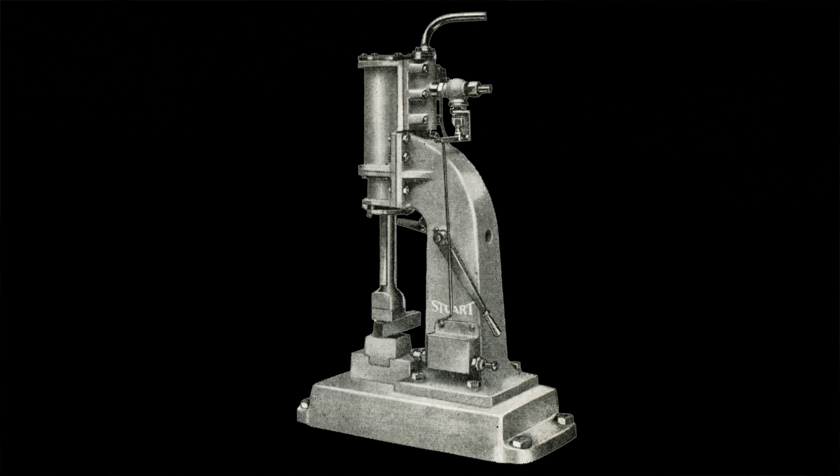Welcome back. It's lovely to have you here for part 3 of making a steam power hammer, a little itty bitty one. We got this component, the mouthpiece, made up in the last episode, and right now we're going to get started on the component that fits inside it. That's component number 2, the gland.

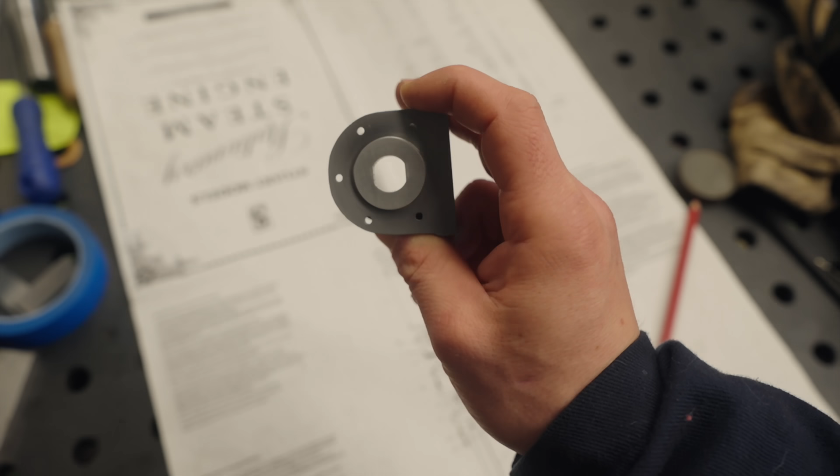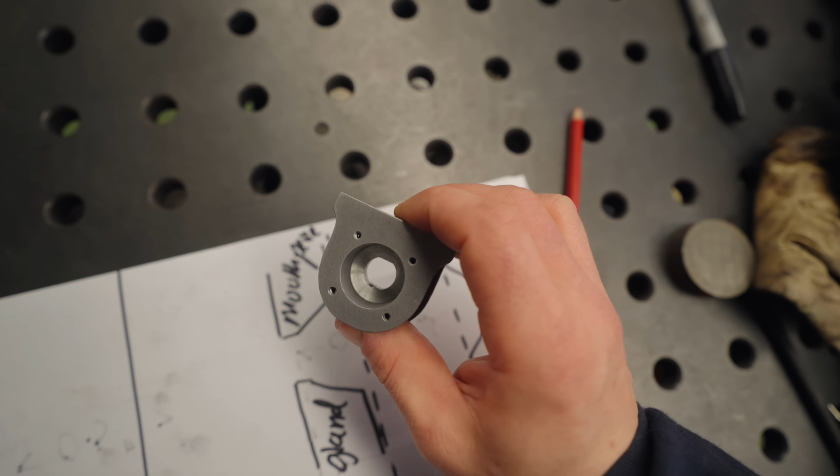What these two pieces do together is hold the ram from rotating, thanks to the capsule cutout both pieces share, and it also compresses the gland packing, part number 7. We've got it right here - it's a graphite-infused cord or yarn of some sort. It gets squished inside that countersunk area once it's been wrapped around the piston, giving us a semi-pliable seal to take up imperfections on the piston rod and the holes we made for it to pass through, hopefully stopping any compressed air or steam from leaking.

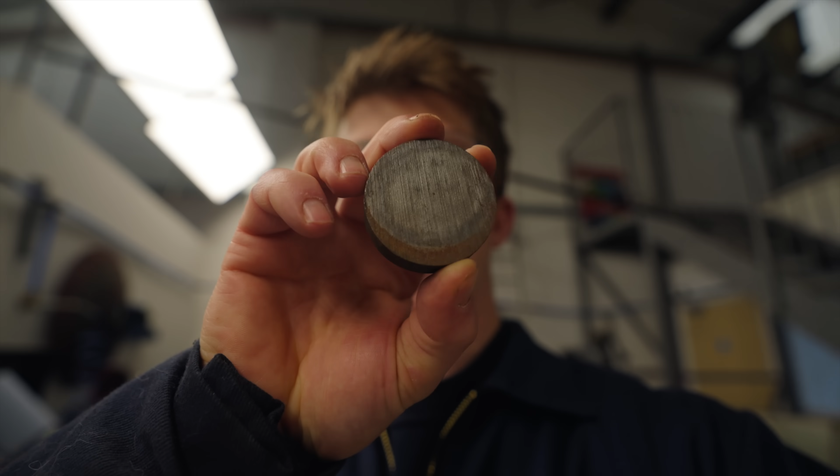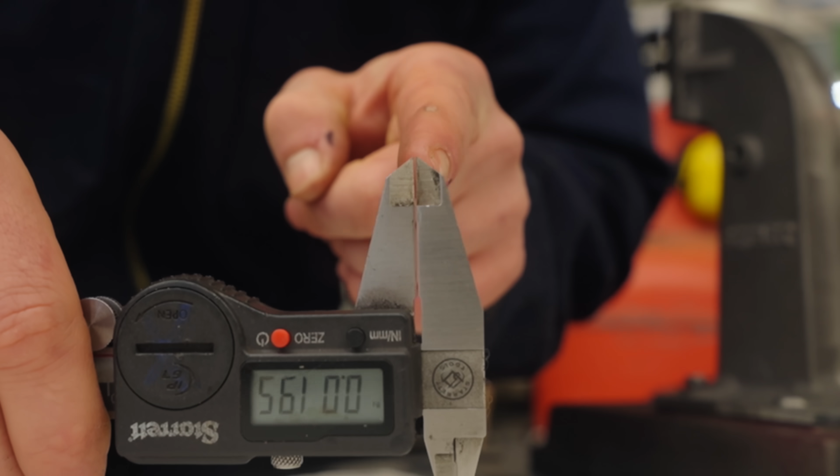I believe this is the bit of metal they supplied for us to start from. It's probably cast iron. They really don't give you a lot of extra for work holding, let me tell you that. Oh my goodness, I only have 20 thousandths of an inch to spare lengthwise.

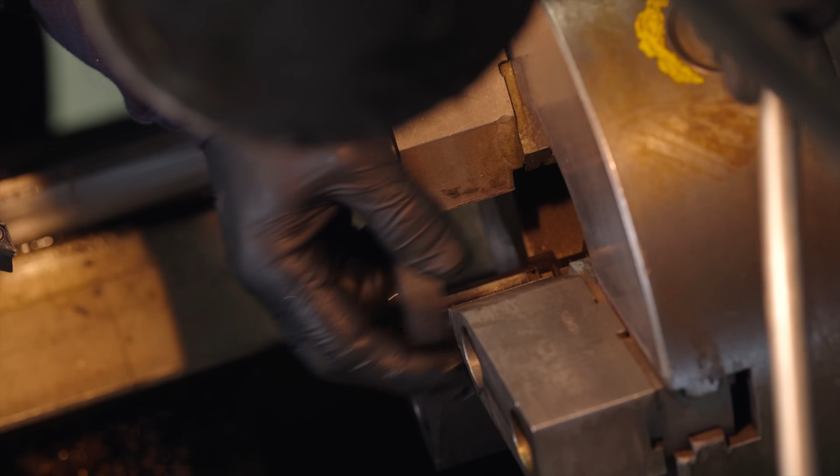You're kidding me. No! I already made that identical arbor. I wasted all that time making the exact same thing.

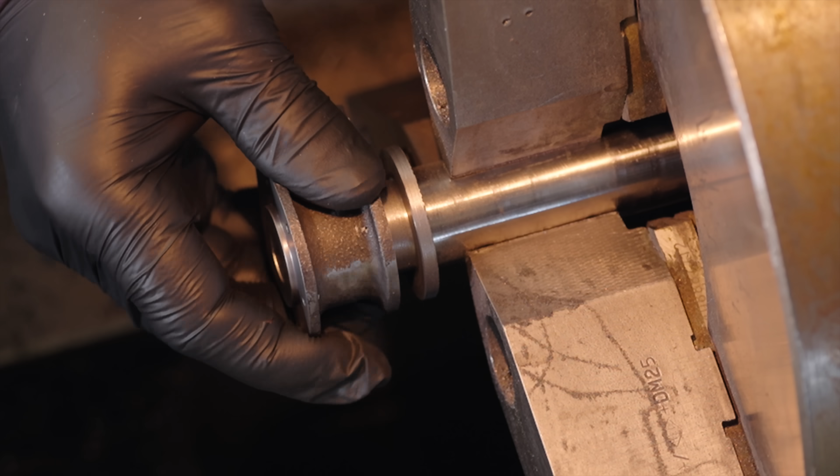Perfect! All right, so we are now out of the lathe. We are in the milling machine.

I really appreciate everybody's advice to go check out Joe Pieczynski on YouTube, and I appreciate him reaching out directly to recommend I look at his videos. In the past, I watched tons of his videos back when I was learning machining, but since then I've forgotten a lot - you're only as ripe for knowledge as you are in that moment. So what I'm doing here is getting this thing indicated in.

When I was doing this the other week, I had this indicator in a really annoying orientation. Small little tips, like having the dial facing up, incredibly helpful. All right, we've got that thing dead nuts zeroed out.

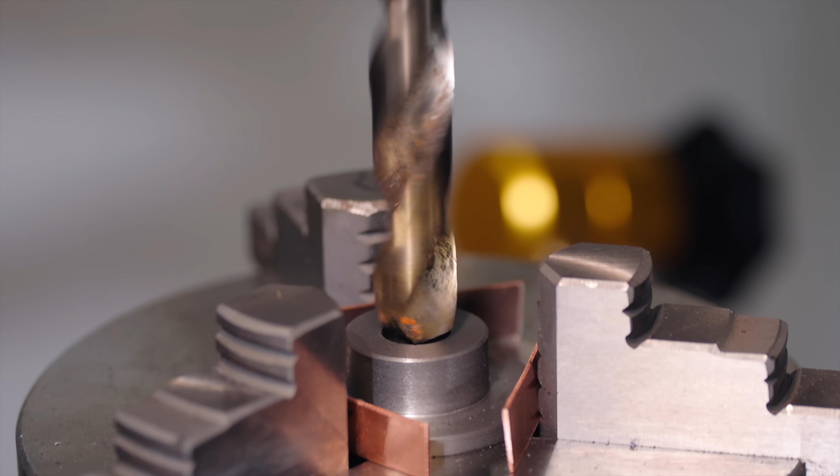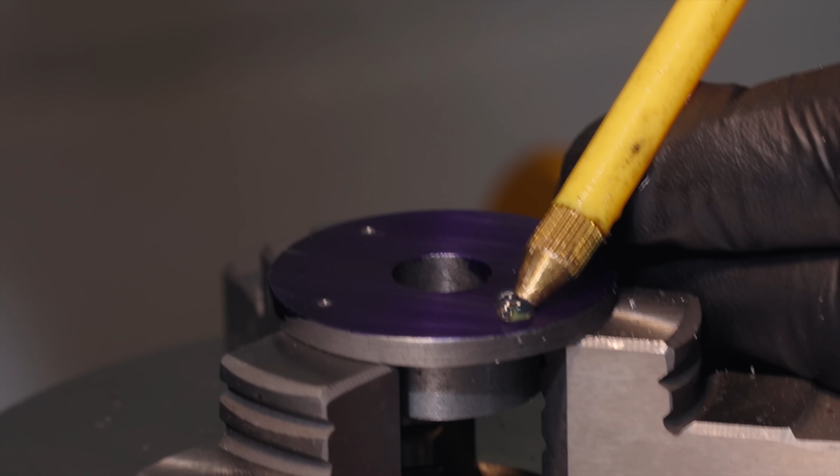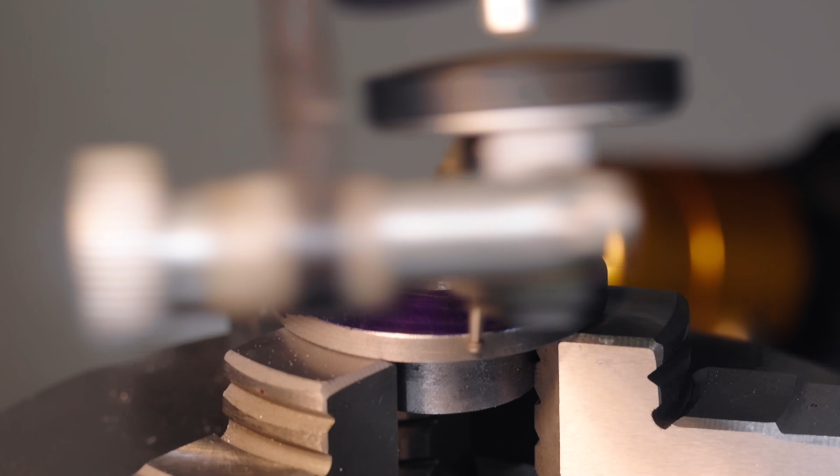Something's not bloody right. Crap. That's not normal, we're not in the middle. How is this not in the middle? I indicated everything, made it with a mandrel. We're not in the middle. How's it that far off center? How did we get so far off? I have no idea, but it should be good now.

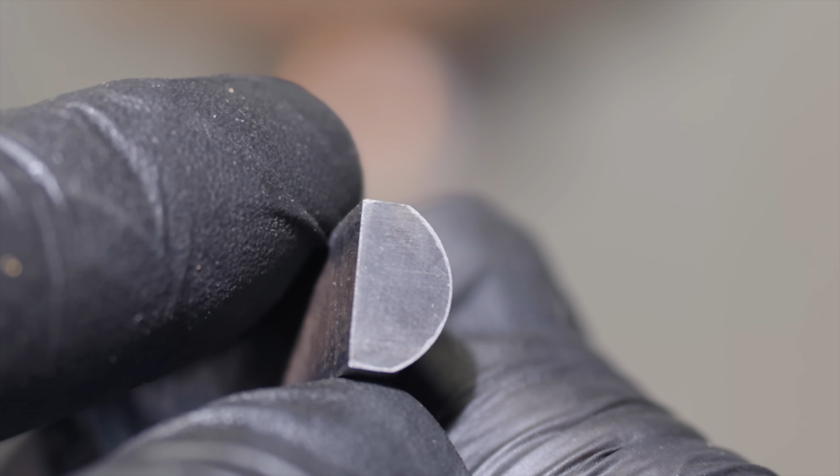Crap! We'll just push it right back in, and then we'll pretend that absolutely nothing happened.

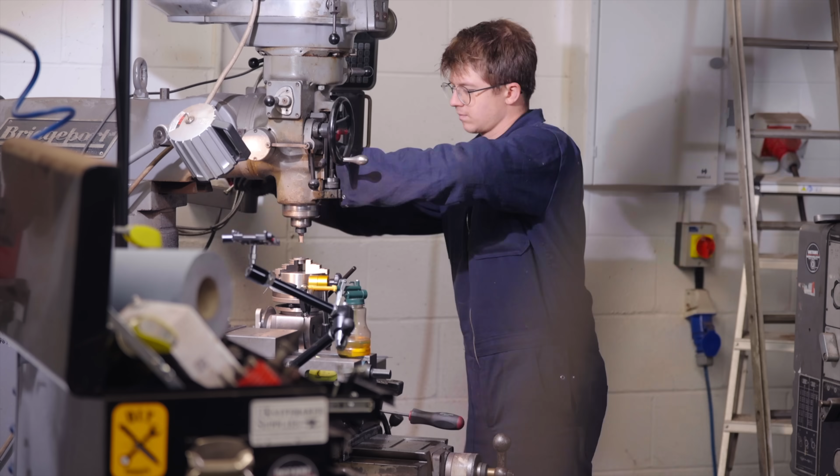I'm really surprised with how well that little 4340 slotting tool has held up. I'm incredibly surprised at how well the Bridgeport milling machine works, very unconventionally mind you, for slotting. And the result of all that work is this one tiny, seemingly unimportant part that fits perfectly into the piece I made last week, which makes me so happy.

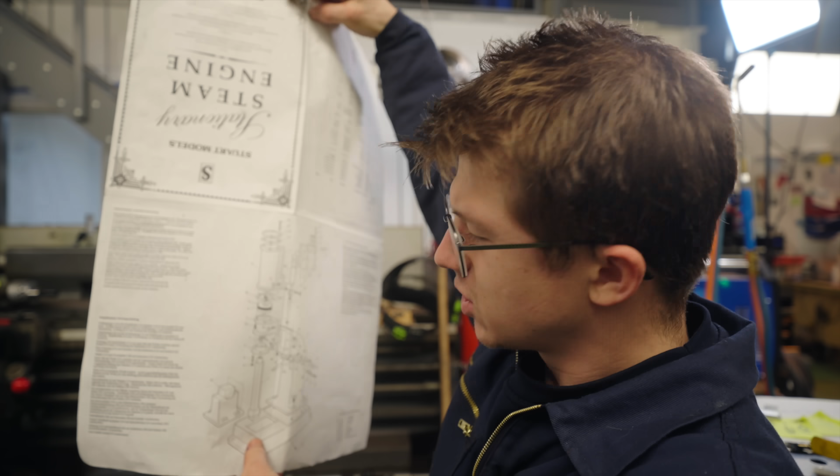But remember episode 1 where I was getting panicked about how long this was going to take? Well, so far I have not done a single thing to this that took less than a day. And the numbers go up to 47 on this thing, so if every single tiny little thing is taking me a day, I'm going to be here a bloody long while. Which doesn't actually upset me too much.

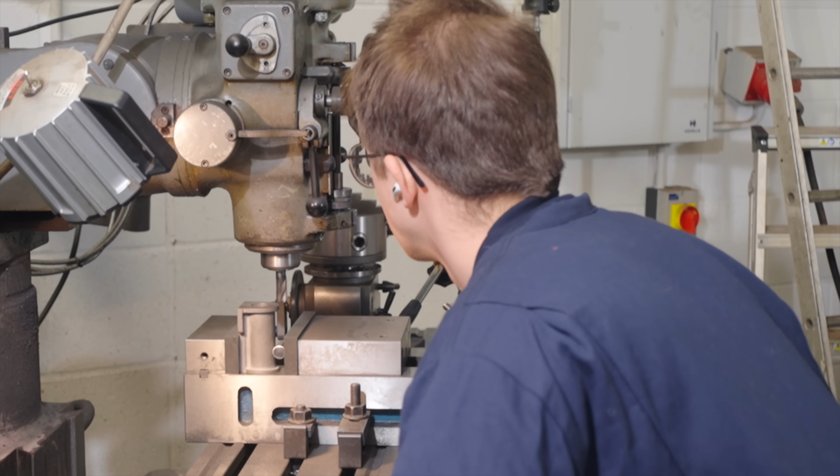Because right now I am having just the best time in the workshop. You kidding me, why are you not square? I'm so happy to be freshening up these machining skills. I've been chasing square on this thing for an hour, because everything machining I've done in a while has been quite clunky and kind of get-it-done type of stuff.

But here I need actual precision, and I need to work to drawings for the first time ever. And all of this feels so far out of my comfort zone, and I feel like that is exactly what I needed. I just really hope we can keep this entertaining and enjoyable for you through this series. I hope it doesn't become a bore, because at this moment right now, this is exactly what I want to be making videos about.

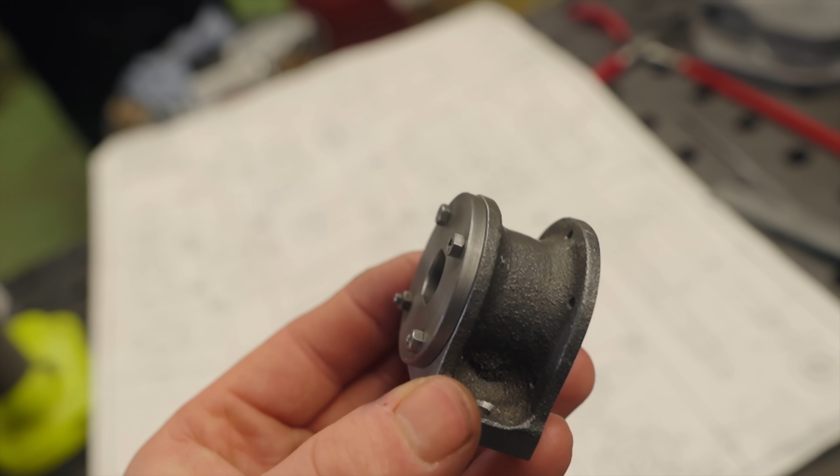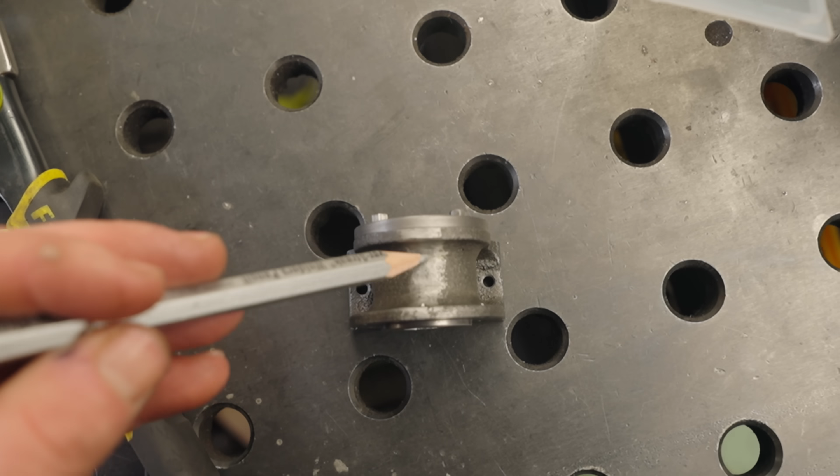What I've already learned from making this larger component down here is I need to pay attention to how deep I go with those drill and tapped holes, because I've actually poked through just a little bit on about all of them, and it's quite ugly. I need to do a neater job of cleaning up that stuff, because it just looks awful.

So we'll probably need to do a touch of modifying on this at some point if we have time. But for now, we're gonna have to take these lessons on to the future pieces.

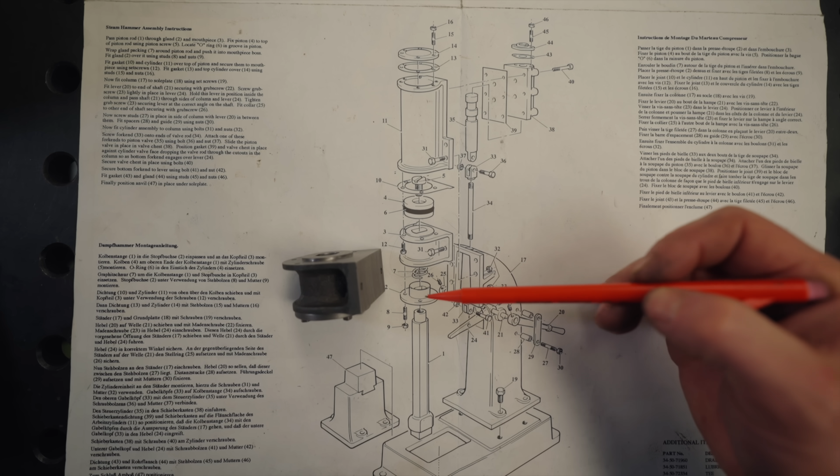It's time for some making. Making what, you say? A really fun, easy part. Let's make the part with the 90-degree holes, why don't we? Easy peasy, called the cylinder, number 11. So let's refresh our memory on the exploded view. We just made the gland. This is the mouthpiece. That is the cylinder. And this is what it needs to come from.

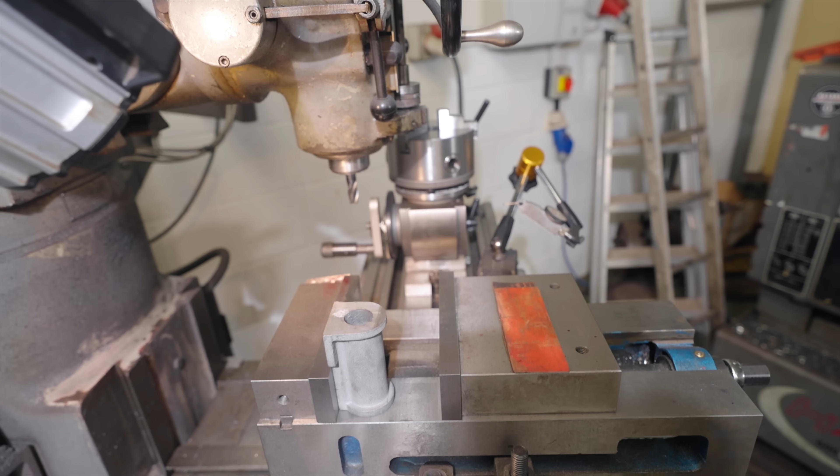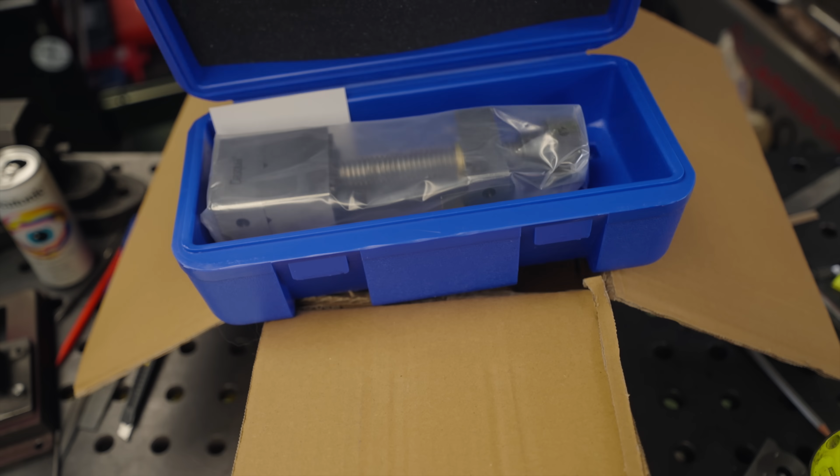Oh, have we had another delivery? Jamie, you know why I like this project so much? Because we keep getting more tools. Oh, what is this? Oh, that is a little baby tool maker's vise. I think to describe it simply, it's a vise that you put inside of another vise.

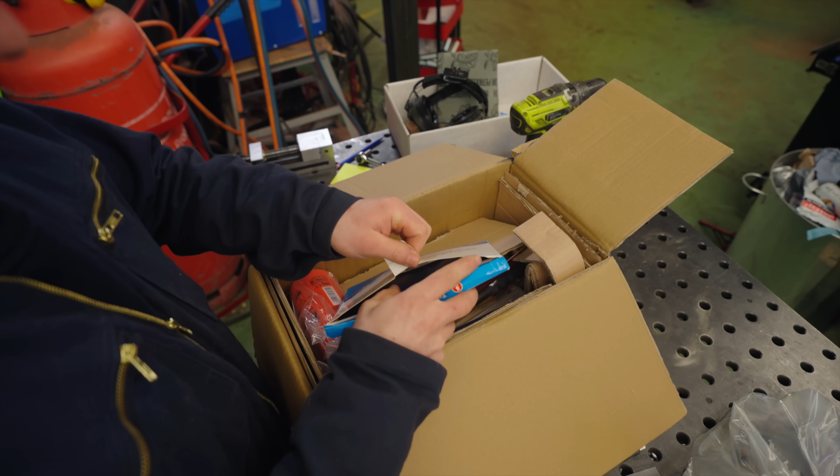All right, cheapo, completely unbranded telescoping gauge set. I have a Mitutoyo set, hopefully this does the trick. You put this inside a bore, you tighten off the little screw, and then you can take a set of calipers or a micrometer to it before releasing it.

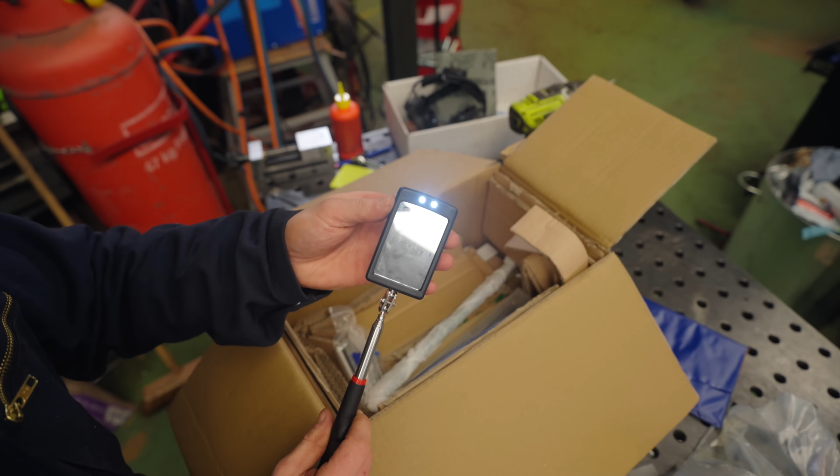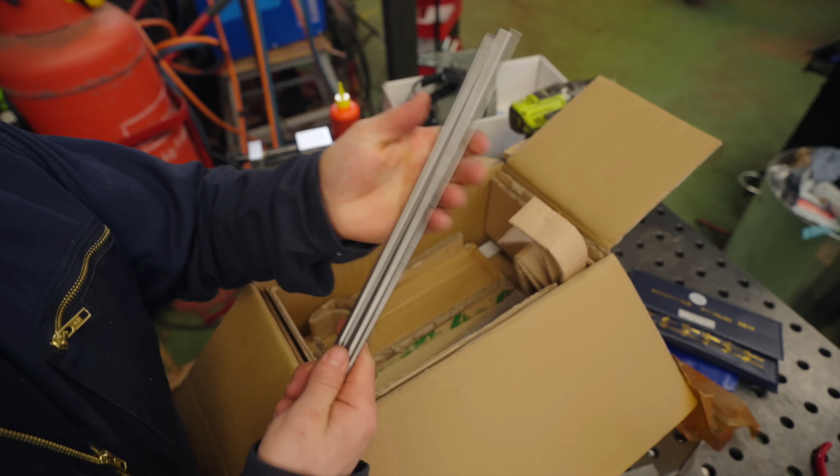Cutting oil. Aha, yes, a little mirror for getting behind things. It's got a light, I've always wanted a set of these. A set of adjustable parallels. After having to make our little slotting tool from 4340, I figured I should have some more high-speed steel blanks on hand, as well as a little silver steel. It's just high carbon steel that's been precisely ground. Most importantly for this component we're working on, this big old 1-inch reamer.

And with that, it's back to work. I lied! We've got another package! And it's a heavy one!

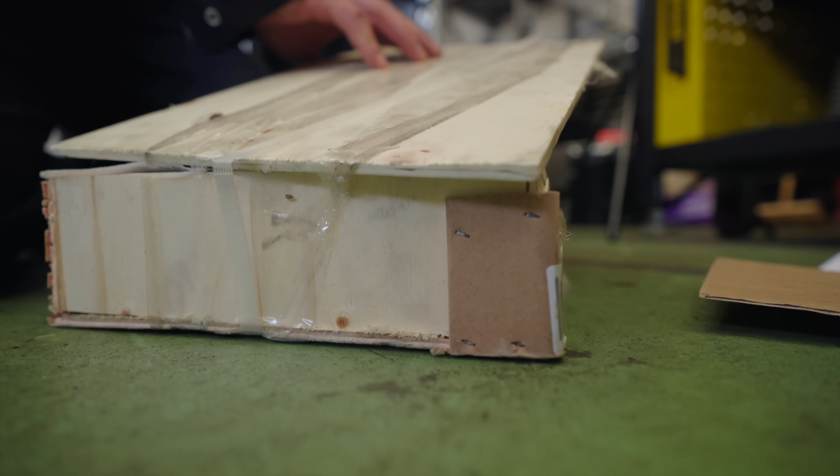It's a cheapo granite surface plate. We have needed one in here, and conveniently we can use it right now. I need to get some measurements and check how square we are. Okay, we're within 1/1000th of an inch.

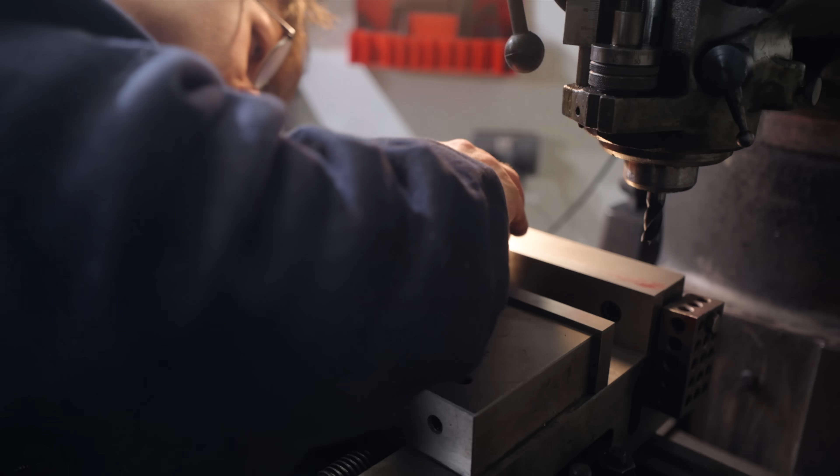You're all right, this is just challenging. I'm trying to get this thing square and perfect, and every time I take it out and put it back in, I feel like it's not square and perfect. More stressful than I would like.

Why don't you use your app? Probably not a bad time for a little 60 seconds of breathing, eh?

What do they have for me? 60 seconds of mindful breathing.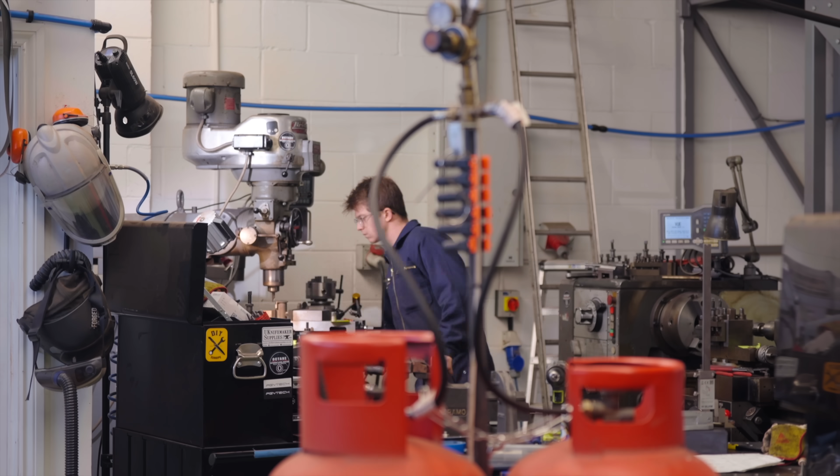All right, so it's a new morning. The first thing I did today is I retrammed the head of the mill just to make sure that it was dead nuts.

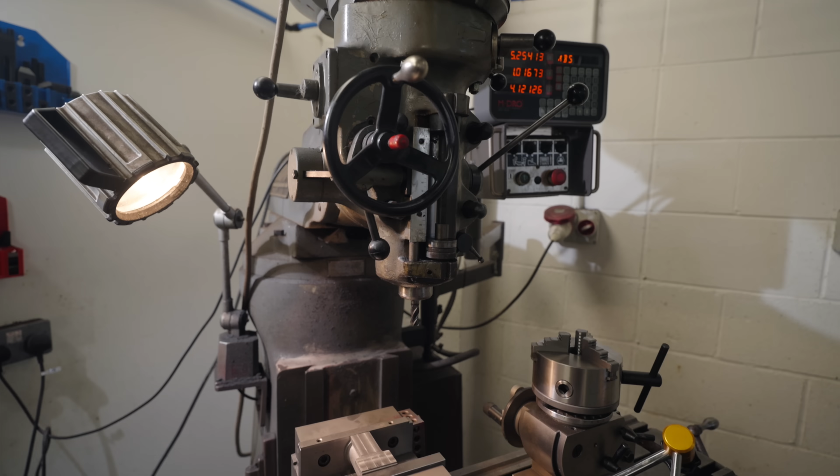What I mean by tramming a mill is these Bridgeports can rotate their head this way, that way, as well as nodding forwards and back. It's incredibly important to ensure the spindle is square to the surfaces we're using as flat, because otherwise everything's gonna go all cattywampus. When we get to boring our cylinder bore, we need a mill that is just so square, it's unbelievable. But I don't think I had unbelievable squareness on there, and when I put the dial test indicator on it, I found that I've been doing much of this project with the mill about 1/1000th of an inch out of square.

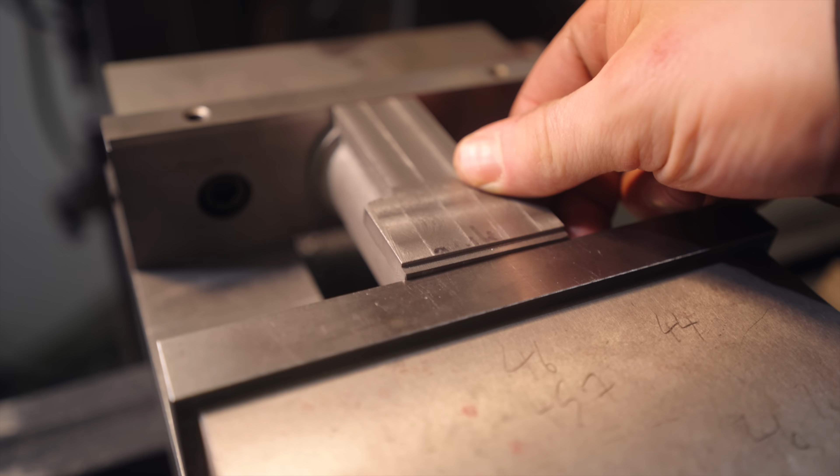What you'll see right here is our part is now upside down with the back face facing upwards. We're going to ensure it is sitting nice and square this way as well as that way. It should be, those two faces are square. And we're going to take off some of this material.

Now, on the drawings we have a very important dimension, and that is this 7/8 gap between this back face and the center of our 1-inch bore. Our bore is currently a rough cast hole, nowhere near the 1-inch final size it's going to be. But we don't want to just put the hole anywhere and bore an off-center hole through the existing hole in the casting. So I took a rough measurement from that hole.

Not really rough, it was as accurate as I could make it. In the previous setup, I milled this little ledge 1/1000th of an inch proud of where we need to bring this face down to, in order for the rough cast hole bore to line up as close as possible to the final hole center of the final bore relative to that back face. Good Lord, this sounds really complicated.

So now we're bringing that back face to size and then resetting it up in the mill to begin our boring operation.

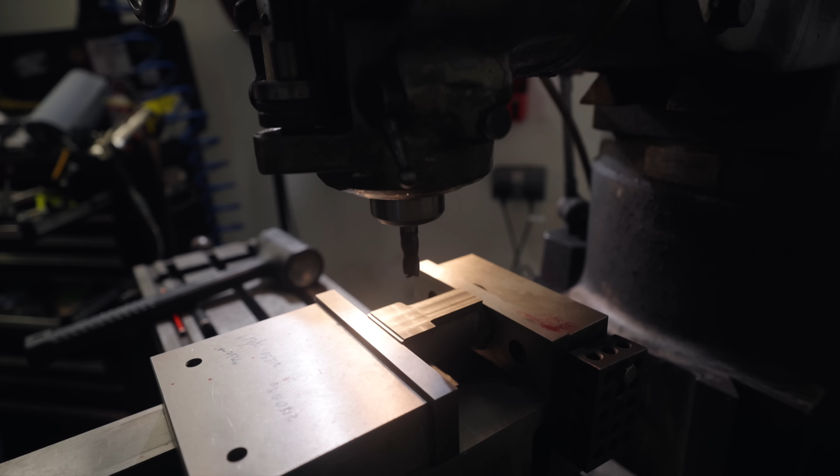Change of plans. We're gonna put some holes in the back here while it's set up.

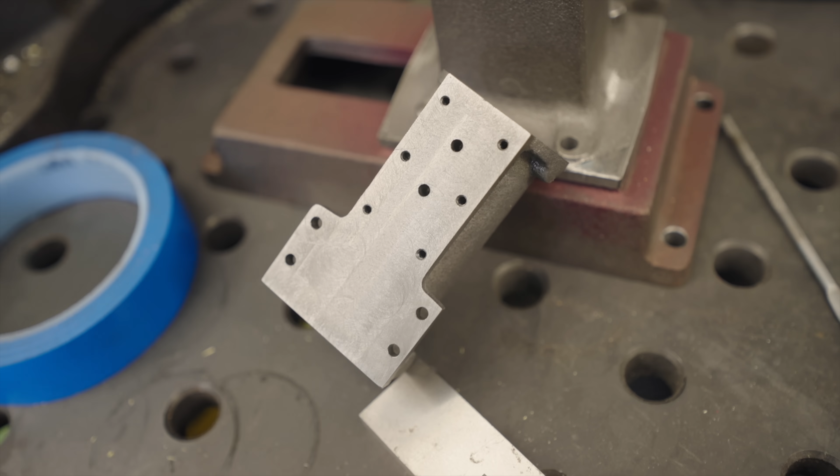All right, so we got all the holes done. And while doing it, the delivery driver's dropped off more stuff for us. What did we order this time?

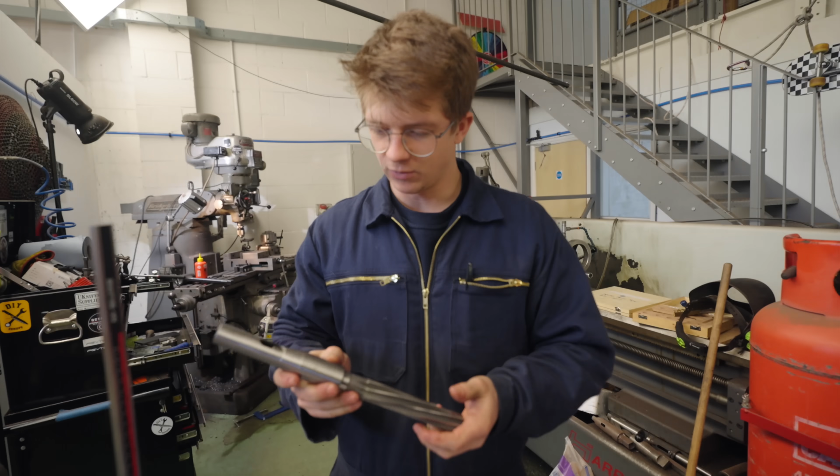Ah, yes. Now, I actually already have one of these sitting on a pallet. Oh, can you knock it off? This is an adapter so that we can fit our Morse taper reamer inside the Bridgeport mill. We're going to be needing that, that's for that big hole.

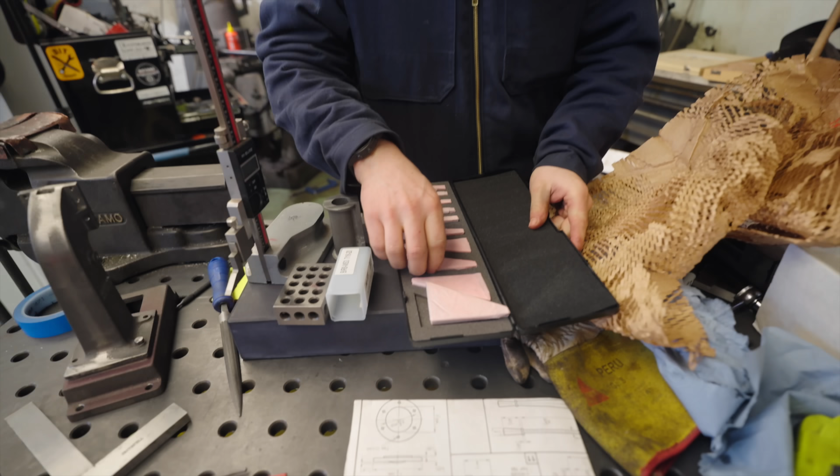Is that bee's nest? It's a bee's nest, yes. Without the honey? Mm-hmm, it's just comb without the honey. Oh, fabulous, more tools I don't need. They look like little bits of cheese. Yeah, they really do. Precision angle set, that's a 20-degree angle. I don't believe I have any use for that with this project, but one day, I've got it.

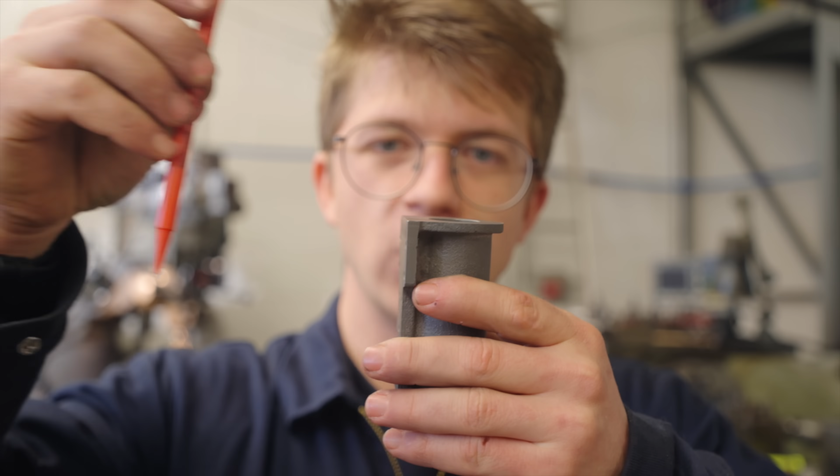So we've been chatting about that bore for a long time, and it seems like it's never time, but now it is the time. This is gonna go in the vise. We're gonna reference off of this back face and these two sides, that'll give us the middle, and then we're gonna move across 7/8 of an inch, where we're going to use a boring bar to begin opening this up.

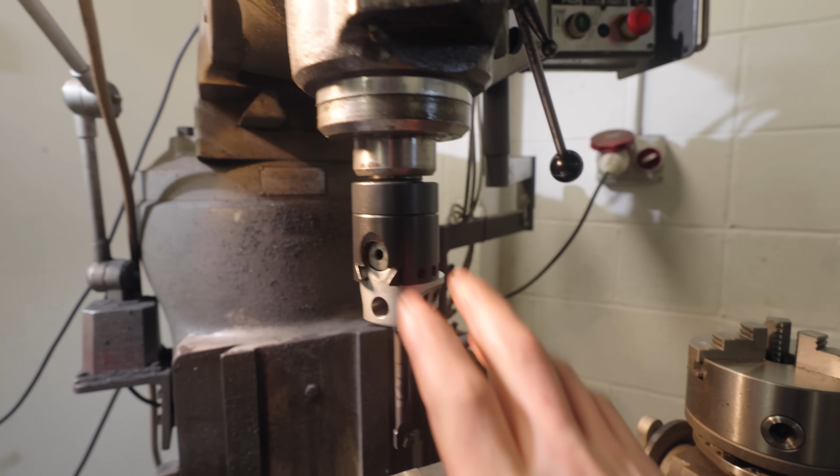I think I've run into the old buy once, cry once problem with this boring bar. Now, as you know, a good craftsman always blames his tools. The way this boring bar works is our cutter is held in this light grey bit, which is dovetailed into this darker section, and then there's a screw with a micrometer dial. Whenever you want to change the settings, you loosen these a little bit, turn the micrometer dial, then tighten up those grub screws, and you should be good.

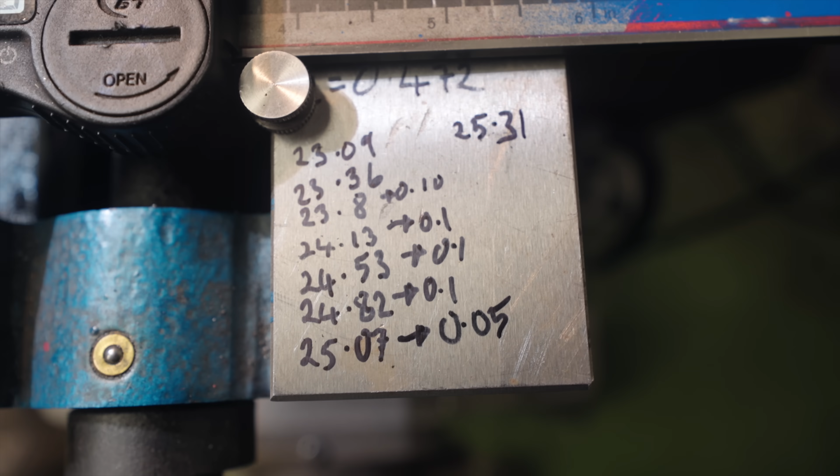Now, here's the thing. I took a record of every single move I made, and not a single one of them produced the same result. There was nothing consistent about it. I think part of that is because there's a load of backlash in this thing. You can kind of spin it both ways, and I always make sure to snug it up to compensate for the backlash. But even then, there's funkiness that happens with that stupid boring head, and it's one of two things. One, it's a cheap piece of crap, and that's a possibility because it is the cheapest boring head I could buy.

I don't know how to use a boring head well enough. I've been experimenting, gingerly snugging and unsnugging things to make sure there's room for variation. But despite that, the very top of this hole is 1 inch and 2 thousandths, and the rest is 997 thousandths. So we've got a step, and 3 thousandths to go to get it perfect. I think it's time to say enough with the boring bar - we don't trust you, you're unreliable, and maybe I just don't know how to use you.

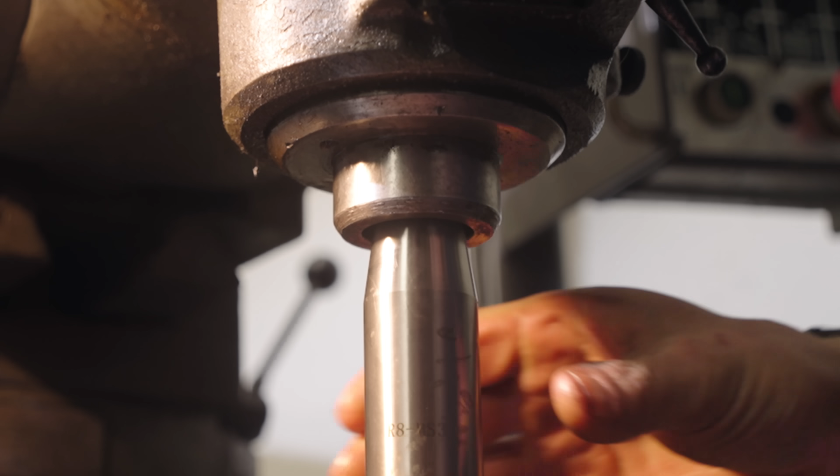Now we switch to the old Mac Daddy. There we go, low range. If this doesn't work there's another option. I hope this works and makes a nice surface finish though - I've never reamed a hole this big.

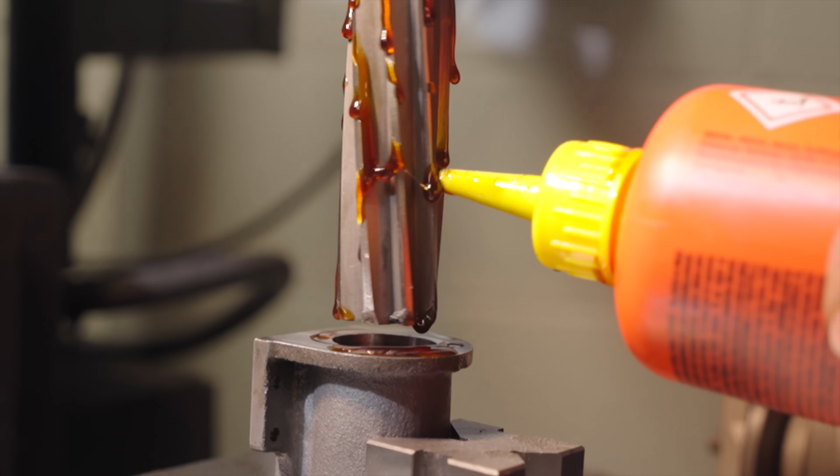It's cutting. Why put maple syrup on it? Oh, that's special machinist's maple syrup, Jamie.

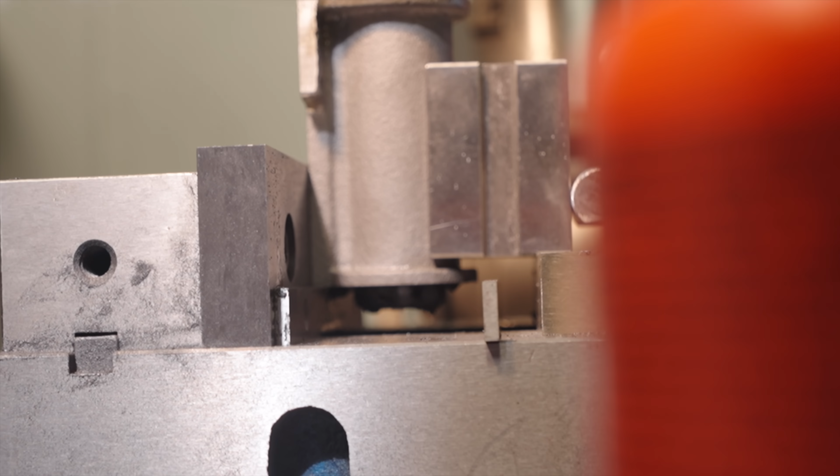I really hope this gets it to the right size. Doesn't really seem like it's doing anything - it's gingerly cutting. Well, there's only 3 thousandths of an inch to cut, provided this reamer is quite accurate. Oh, look at it, it's dripping out the bottom. Now we find out, is the surface finish any good? I quite like it.

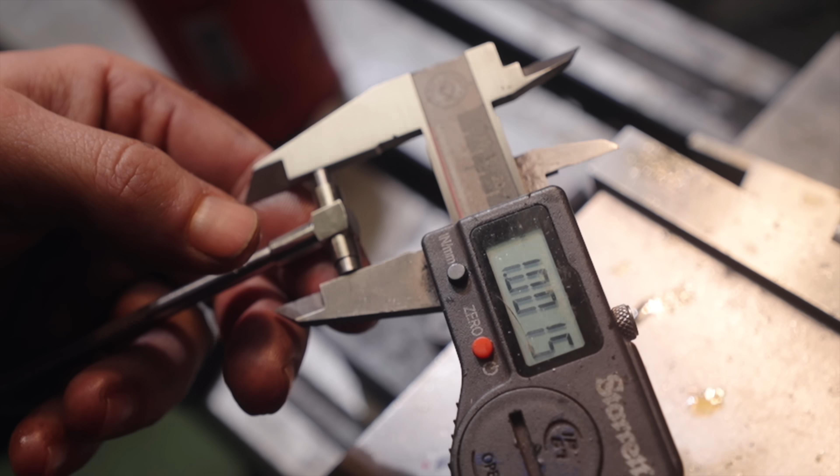Moment of truth, we measure it. I want 1, 1, and a crap load of zeros. Oh, bugger - we're 1.5 thousandths proud. I guess I just learnt a lesson: apparently my reamer will make my hole 1.5 thousandths proud.

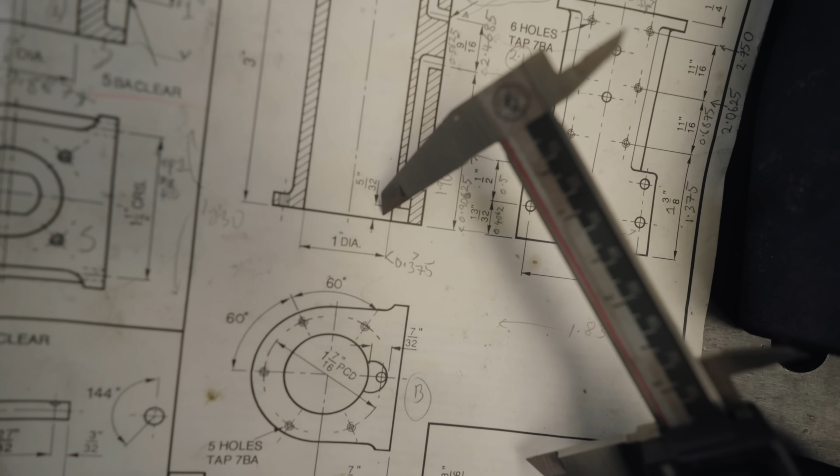All right, holes drilled and tapped. Next up we've got an interesting feature to put in - this little thing right here, and that's the port that lets air into the cylinder. Looking at the side view, you'll see this little recess, that's this semicircular feature that's cut down. And looking back, you'll find our 90-degree 1/8 hole opens up into that little semicircular feature. It's quite an important part because this really affects the function of the machine - it's the port letting air into it.

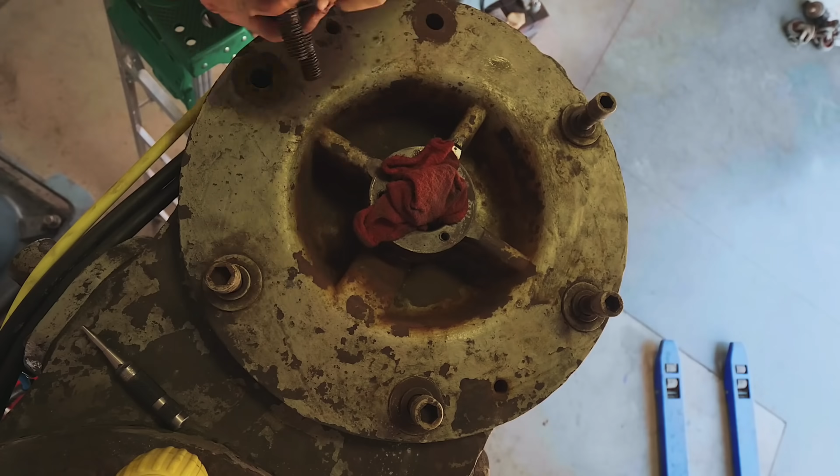What's extra cool is I think we've seen on this channel a port in real size just like this. If you remember, we were taking apart the Chambersburg power hammer to get it running smoothly. When we took the head off the machine, there was that same port, just a lot bigger than the one we have to make here today. Unfortunately these drawings aren't super clear - all I know is it cuts in 7/32 of an inch, and we'll probably have to pull the other measurements off the drawing with a set of calipers.

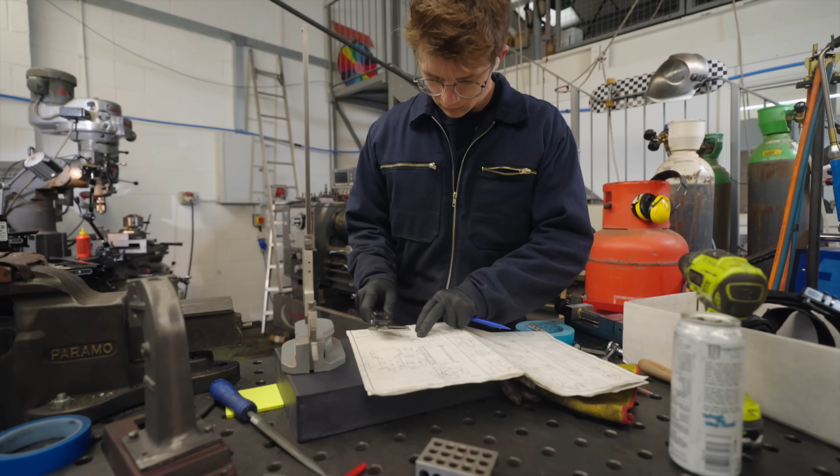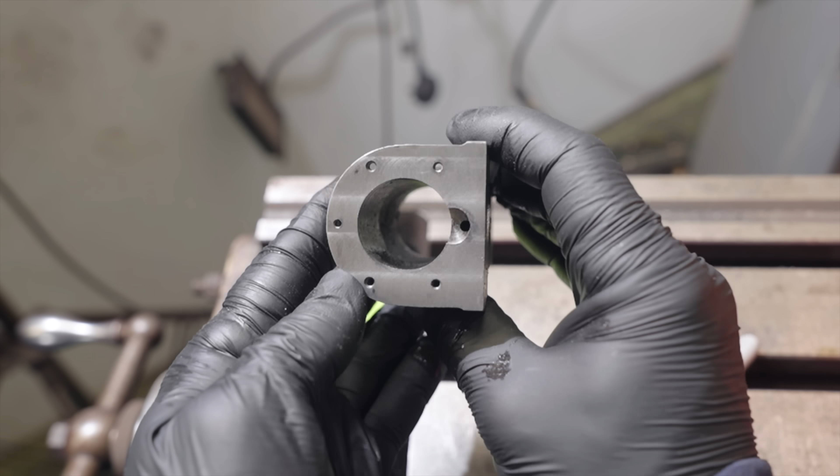All right, so there it is - there's our port. Now remember that 1/8 inch hole goes all the way down, and it was meant to meet up just at this hole that we put in on the other setup. Have a look, you can see chippings in it. And I blow it with air.

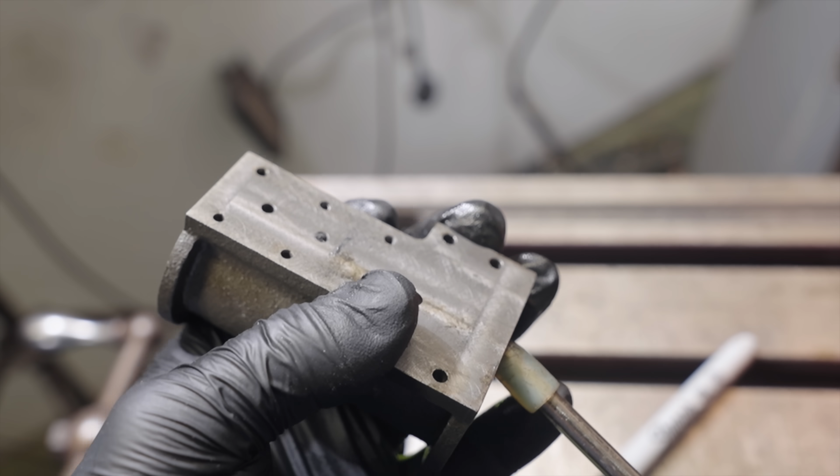Woo-hoo, we've done it, the holes line up! I love it - oh look, you can see daylight. That's a long hole to make line up. I'm very happy, it means our setup can't have been too bad. We're learning stuff. Now we do the same on this side - it's identical.

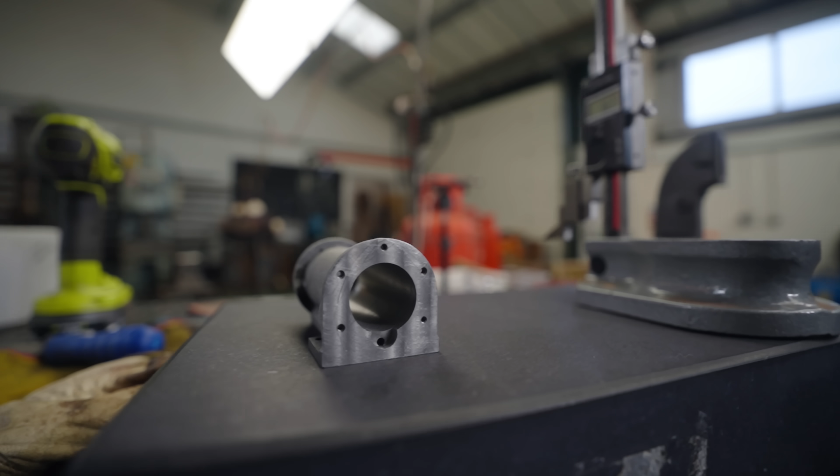Well, would you look at that? That is our cylinder.

Done. I really hope you guys are enjoying these videos.

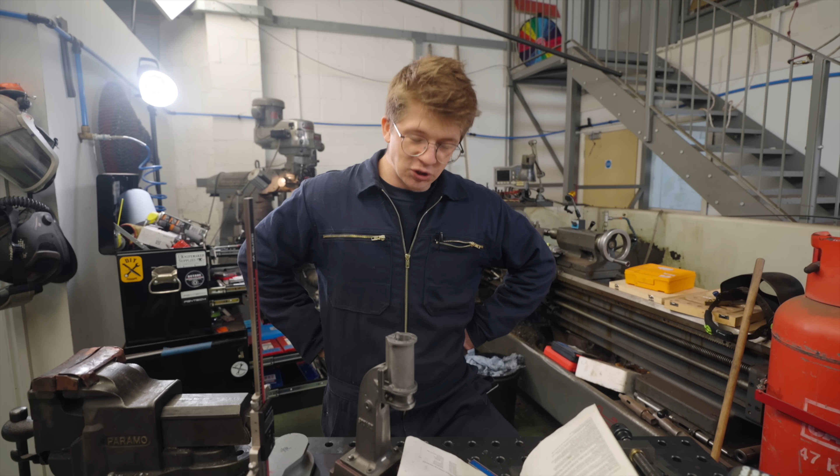Oh no, Jamie, you know what's next? It can't be.

Find out next time. Do you have any ways we could make this a really exciting outro? That people... that was really cringe, and I'm going to leave that in. There you go, done.